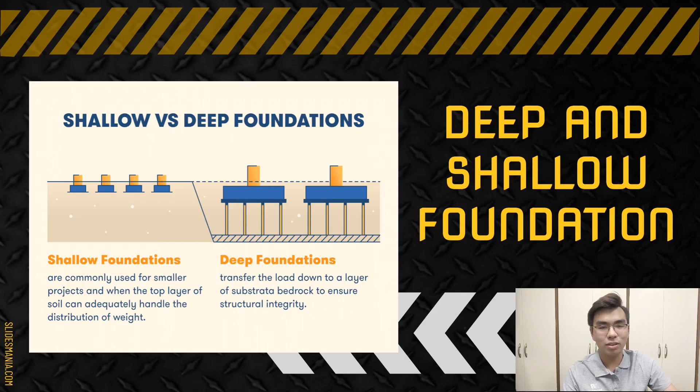The first type of foundation is deep foundation. Deep foundations are required when building on sand and other soft soil that cannot absorb the load of the building. Instead, a foundation must be established deep underground or even underwater, where contact with stronger layers of the earth can be established. Bridges, piers, and dams, for example, must lay foundations underwater while still retaining structural integrity. This is where deep foundations become essential to the construction of large structures.

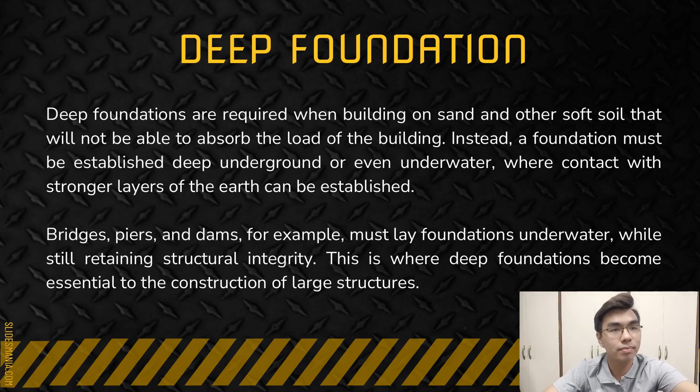The second type of foundation is shallow foundation. Typically, a shallow foundation is one that is wider than it is deep. Shallow foundations can also be called spread or open footings. For obvious reasons, they are the more economical of the two types. They don't require much digging or boring into the earth, which is why they are the most common. Shallow foundations are useful when the building isn't exceedingly heavy and the soil can bear a significant amount of weight at a shallow depth.

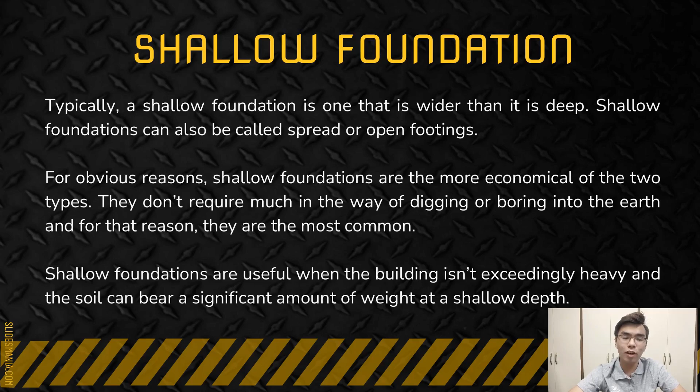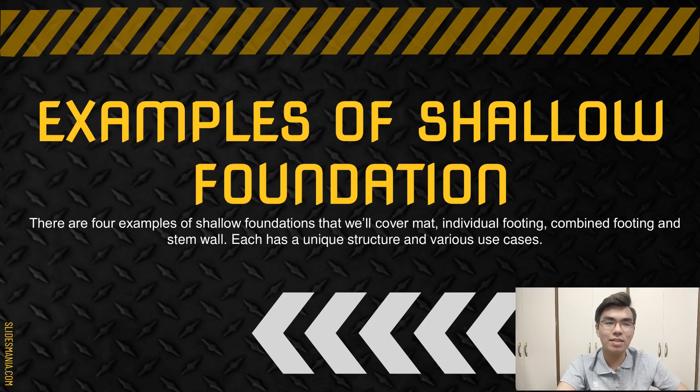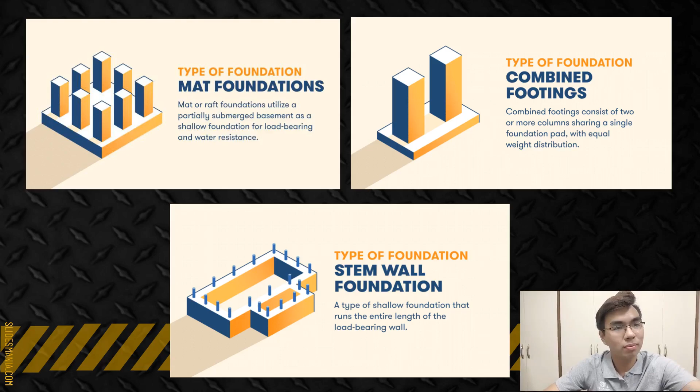The first type of shallow foundation is mat foundation. A mat foundation takes full advantage of the surface area where the building will be erected, essentially using the basement as the entire load-bearing foundation. Mat foundations are often used when the soil is loose, weak, and requires the weight to be distributed evenly, and when a basement is feasible with pillars or columns spaced close together. It is often referred to as a raft foundation because the basement foundation is submerged in the soil, like the hull of a raft in water.

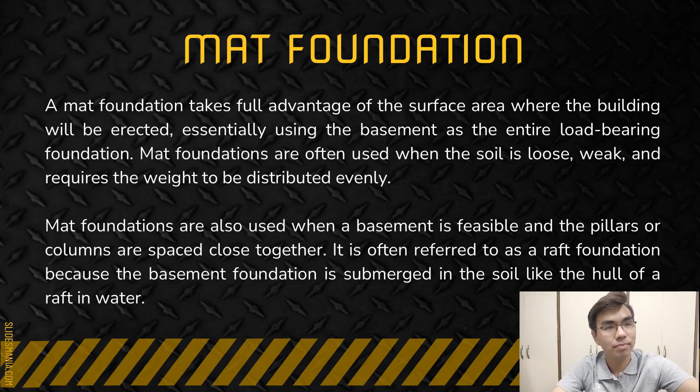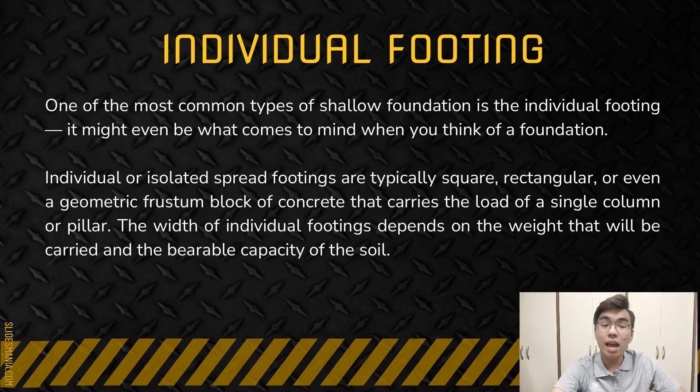Second, under the types of shallow foundation, is individual footing. It is one of the most common types of shallow foundation, perhaps even what comes to mind when you think of a foundation. Individual or isolated spread footings are typically square, rectangular, or even a geometric frustum block of concrete that carries the load of a single column or pillar. The width of an individual footing depends on the weight it will carry and the bearing capacity of the soil.

Third, for shallow foundation, is the combined footing. A combined footing is very similar to an individual footing, except one base shares the weight of two pillars or columns that are close enough together to warrant a shared foundation point.

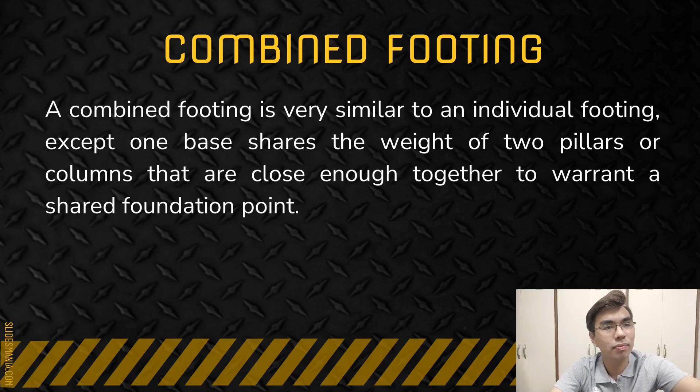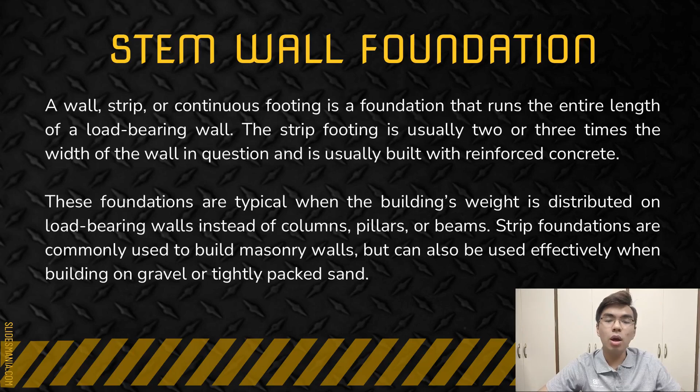Lastly, under the shallow foundation is the stem wall foundation. A wall, strip, or continuous footing is a foundation that runs the entire length of a load-bearing wall. The strip footing is usually two or three times the width of the wall in question and is usually built with reinforced concrete. These foundations are typical when the building's weight is distributed on load-bearing walls instead of columns, pillars, or beams. Strip foundations are commonly used to build masonry walls, but can also be used effectively when building on gravel or tightly packed sand.

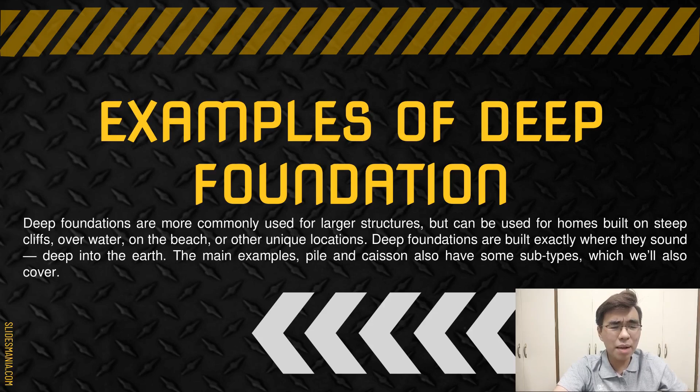Okay, we've finished shallow foundations and the types under it. Moving on, the examples of deep foundation. Deep foundations are more commonly used for larger structures, but can be used for homes built on steep cliffs, over water, on the beach, or other unique locations. Deep foundations are built exactly where they sound: deep into the earth, at the very bottom. The main examples are pile and caisson, which also have some subtypes we'll cover later.

Here are the examples of deep foundation, which are pile foundations and caisson foundation.

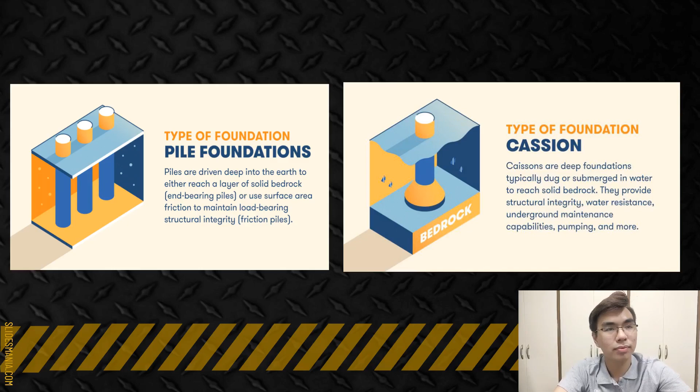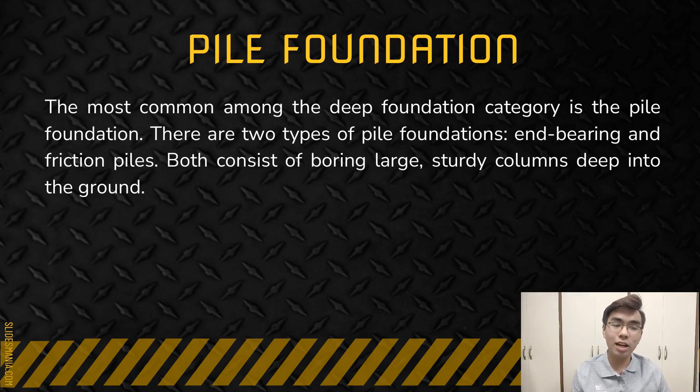The first example of deep foundation is the pile foundation. This is the most common among the deep foundation category. There are two types of pile foundations: the first one is end-bearing foundations, and the second one is friction piles. Both consist of boring large, sturdy columns deep into the ground.

In end-bearing piles, sometimes the soil we build on will never bear enough weight for the project, even with dirt compactors and shallow foundations. Instead, we must bypass this layer of soft soil and get to the substrata of bedrock beneath to distribute the load. End-bearing piles are driven as deep into the ground as necessary for the end to make contact with the rock layer within the earth. This allows the load to be passed through the piling and into the rock, creating a safe distribution of weight.

Second, friction piles. Friction piles take a different approach to the contending layer of soft soil. Instead of boring down to the rock layer, the principle behind friction piles is an exchange of forces with the soil surrounding the column, taking full advantage of the surface area of the column. The amount of weight a friction pile can sustain is directly proportional to its length. Every pile has a zone of influence and must be spaced consistently to ensure even distribution and absorption of weight.

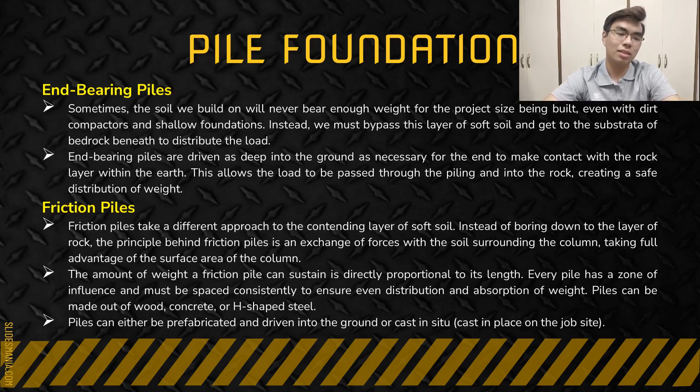The second type of deep foundation is the caisson foundation. A caisson foundation is most often used in construction of a bridge, pier, or other structure over water. But it can also be used to support freeway overpasses, hillside homes, and more.

Caissons can be prefabricated, floated to the drilling site, and placed in a dredged pit. Caissons can also be built on site with a mesh grid of rebar filled with concrete.

To build a caisson foundation, the loose land is dug with an auger until bedrock is reached. While digging, a hollow steel casing can be implanted to prevent the sand or soil from caving in on the progress. The reinforcing mesh rebar is then centered within the casing and concrete is poured, starting at the bottom and filling up the casing, forcing the remaining groundwater out the top. Once the concrete has adequately filled, the casing can now be removed.

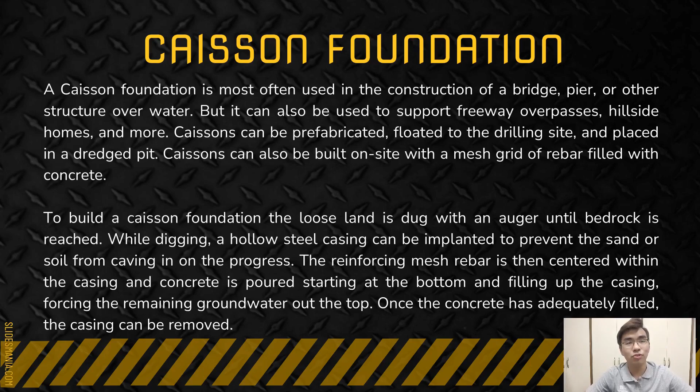Under caisson foundations, there are a few variations. Here are the main examples. First is the open caisson: a box without a bottom sunken into the ground and stabilized with weights for ballast, and a muck tube to remove excess groundwater. The pressurized chamber allows work to be done inside.

Second, pneumatic caisson. When maintenance work needs to be done deep underground or underwater, these caissons are built to enable workers down the shaft. Third is the monolithic caisson: large single-column caissons made of reinforced concrete.

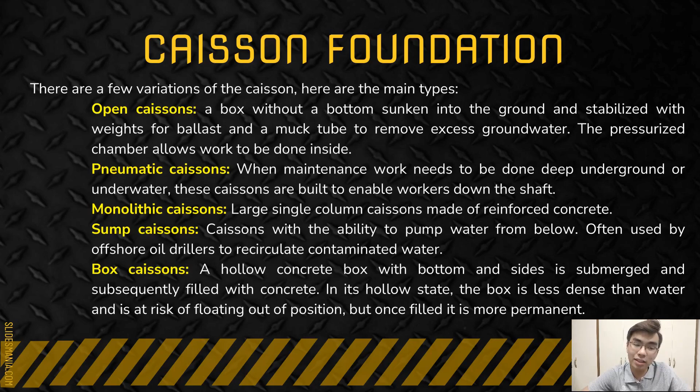Fourth is the sump caisson: caissons with the ability to pump water from below, often used by offshore oil drillers to recirculate contaminated water. Fifth and last type is the box caisson: a hollow concrete box with bottom and sides submerged and subsequently filled with concrete. In its hollow state, the box is less dense than water and is at risk of floating out of position, but once filled, it is more permanent.

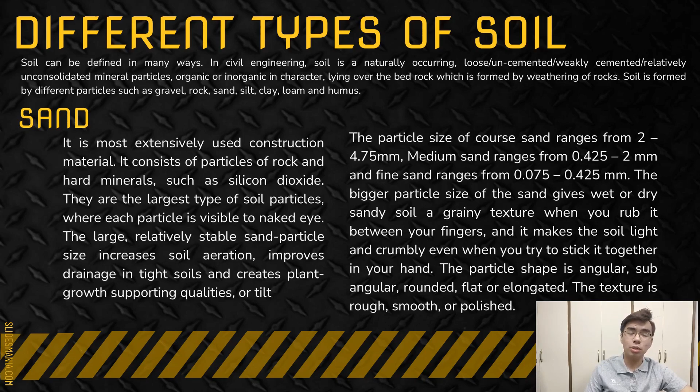The coarse sand particle size ranges from 2 to 4.75 mm. Medium sand ranges from 0.425 to 2 mm, and fine sand ranges from 0.075 to 0.425 mm. The bigger particle size of the sand gives wet or dry sandy soil a grainy texture when you rub it between your fingers, and it makes the soil light and crumbly even when you try to stick it together in your hand. The particle shape is angular, subangular, rounded, flat, or elongated. The texture is rough, smooth, or polished.

The second type of soil is silt. Silt is a sediment material with an intermediate size between sand and clay. It is carried by water during flood. It forms a fertile deposit on valleys floor. The particle size of silt ranges from 0.002 to 0.06 mm. Silt is a non-plastic or low plasticity material due to its fineness. When wet, it becomes a smooth mud that you can form easily into balls or other shapes in your hand, and when silt soil is very wet, it blends seamlessly with water to form fine, runny puddles of mud.

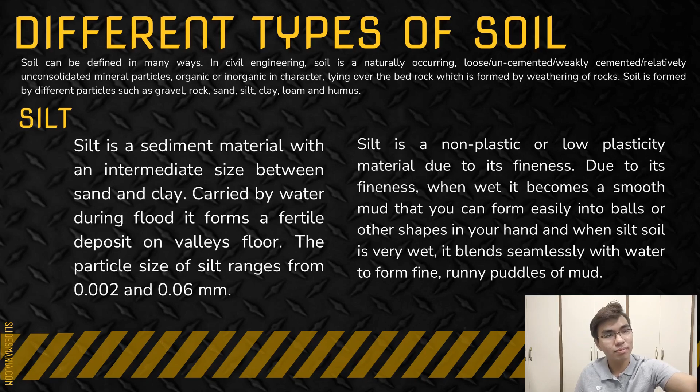The third type of soil is clay. Clay particles are the finest of all the soil particles, measuring fewer than 0.002 mm in size. It consists of microscopic and submicroscopic particles derived from the chemical decomposition of rocks. Clay is a fine-grained cohesive soil. They stick together readily and form a sticky or gluey texture when they are wet or dry. Clay is made of over 25% clay, and because of the spaces found between clay particles, clay soils hold a high amount of water. Clay expands when in contact with water and shrinks when getting dry. Compared to sand particles, which are generally round, clay particles are thin, flat, and covered with tiny plates. Organic clay is highly compressible and its strength is very high when dry, which is why it is used in construction as mud mortar.

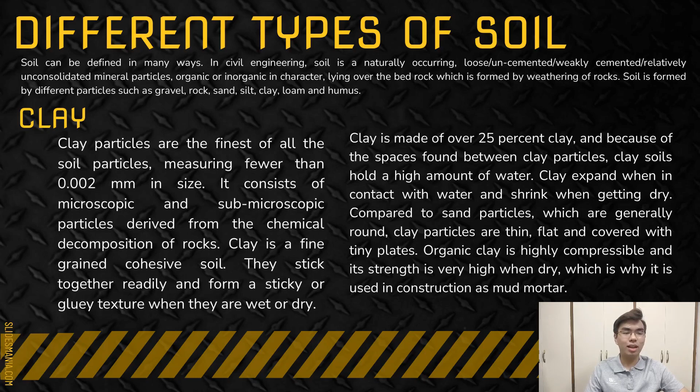For the last type of soil, which is loam. Loam is a mixture of clay, sand, and silt, and benefits from the qualities of these three different textures, favoring water retention, air circulation, drainage, and fertility. These soils are fertile, easy to work with, and provide good drainage. Depending on their predominant composition, they can be either sandy or clay loam. The way other particles combine in the soil makes the loam. For instance, a soil that is 30% clay, 50% sand, and 20% silt is a sandy clay loam. With the soil types before loam listed in the order their particles are most dominant in the loam. The labels clay loam, silt loam, and sand loam are used to refer to soils that are composed predominantly of those ingredients.

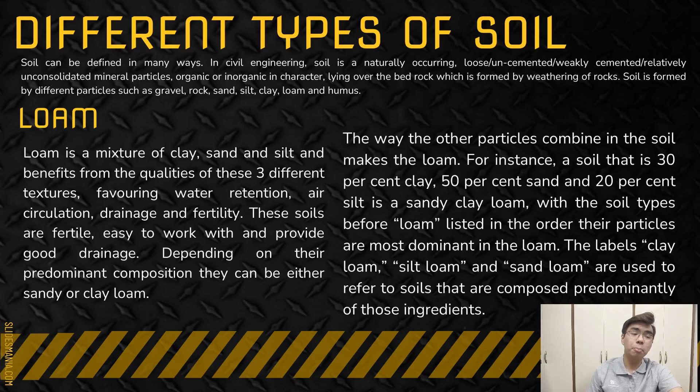Promise, ito na yung last para sa part ko, which is the 4 types of geotechnical testing. So let's start. The first type of this is the test pits.

Test pits are much like you would expect. A pit is dug either manually or with an excavator in order to reveal the subsurface conditions to the depths desired.

Second one is trenching. Trenching is similar to test pits, except that in this case, the pit is elongated over some distance in order to establish how the subsurface conditions change over various parts of the work site.

Third is boring. Borings, usually deployed by a drill rig and drill crew, can vary in diameter and provide the opportunity to assess density through standard penetration testing or SPT, to physically remove soil or rock samples for assessment and testing. This is the boring machine you see being used in the construction of the MRT now, the one that drills into the ground.

And the fourth and final type of geotechnical testing is in situ testing, or on-site testing methods, which include penetration tests such as SPT, which penetrate via drilling, percussion-based investigation techniques, sonic vibratory drilling methods, and various static direct push cone penetrometer testing or CPT. That is all for my part.

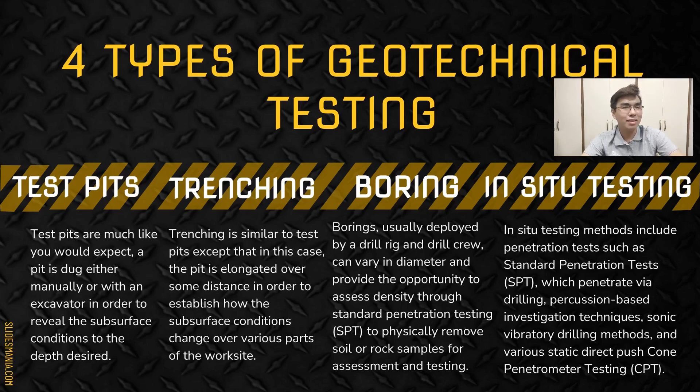The next section will discuss the main types of geotechnical failures that occur in open-cut coal mines. In excavated slopes, these include planar, wedge, toppling and composite failures. In dumped material, these include active-passive wedge failures. Failures that may occur in both excavated and dumped slopes include circular failures and isolated rock fall failures.

Planar failure. These types of failures occur where a block of rock slides along a single defect that dips and daylights in the excavated face. Wedge failure occurs where two continuous planar defects intersect and daylight in the excavated face.

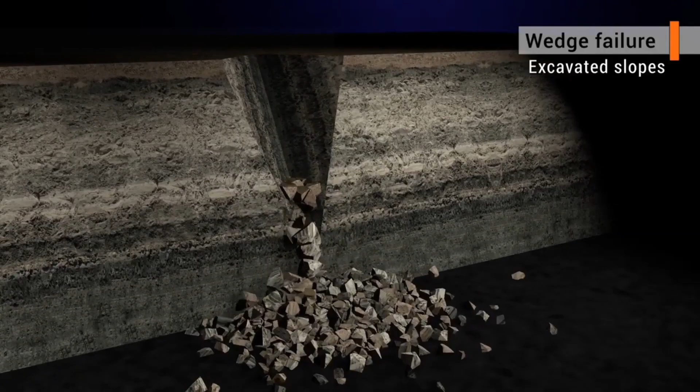Toppling failure. Toppling failure occurs when persistent defects dip steeply into the excavated slope and the blocks or columns formed topple out of the face. These failures generally have a weak layer at the base that the vertical blocks slide along.

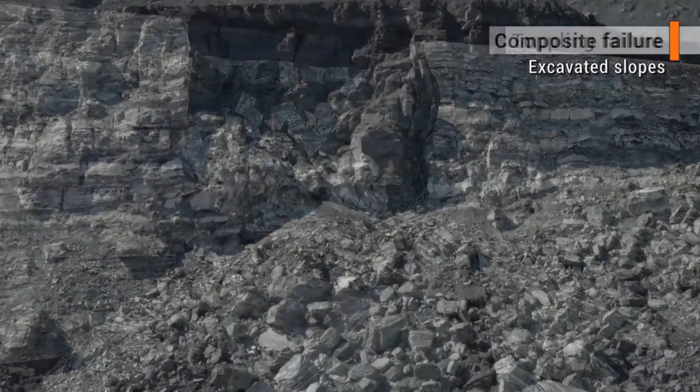Composite failures. These are typically the most common type of failure in excavated coal mine slopes. Composite failures involve a combination of planar, wedge and toppling failure modes along persistent defects, and also some component of rock mass fracturing and failure. Typical composite failures are vertically to subvertically bound by structural defects and horizontally bound by a weak, generally carbonaceous layer. Such failures occur at both the individual bench scale or as a failure of the overall pit slope.

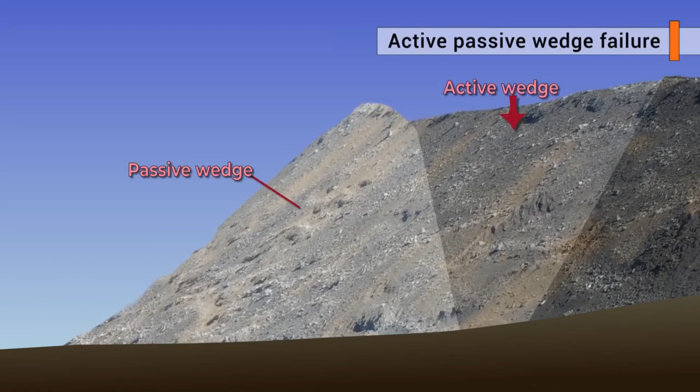Active-passive wedge failures. These types of failures occur in dumped slopes, particularly where the dump is formed on a weak and/or steeply dipping floor. Circular failures.

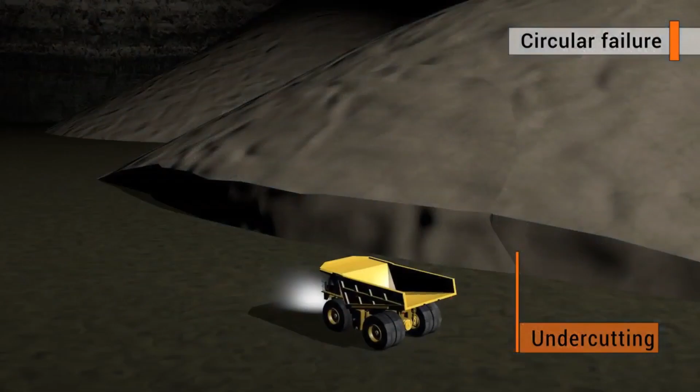Circular failures occur in highly weathered, soil-like or dumped material that contains little to no large rock fragments. Circular failures may be deep-seated or may occur near the surface where they are referred to as skin slippage failures. Circular failures typically result from an excavated or dumped slope that is greater than the angle of repose through undercutting or over-steepening mining practices.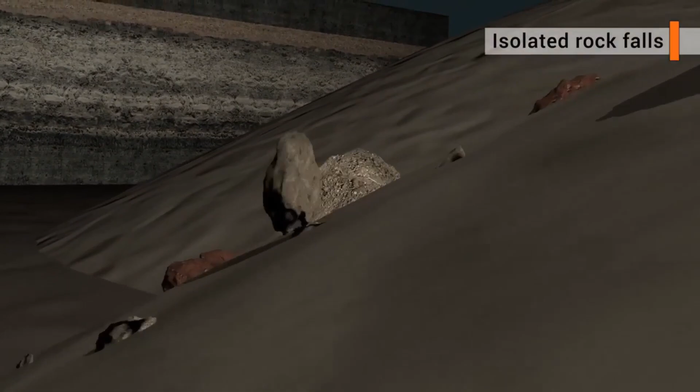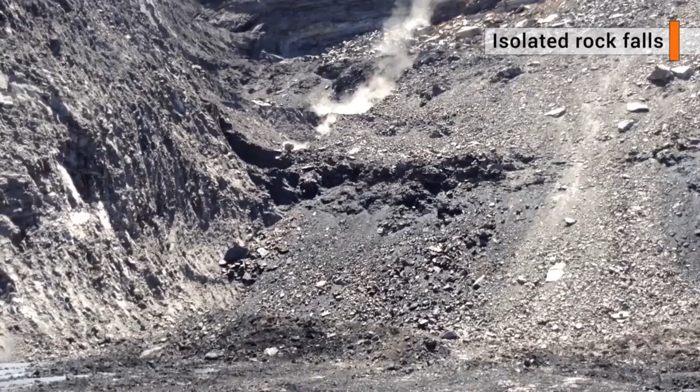Isolated rock falls. These are failures in which individual rocks fall out of a dumped or excavated slope face. Isolated rock falls can be just as hazardous as failures involving a whole slope face. They generally occur after heavy rain events, where poor separation of dumped material has occurred, or where blasting has been poorly executed and the face not adequately scaled for loose rocks at the time of mining.

Once a geotechnical hazard has been identified, an inspection will be completed as per site requirements. Controls will then be put in place to effectively manage the hazard. Controls must be followed at all times. If you observe conditions to change from those documented in the site hazard report, notify your supervisor immediately.

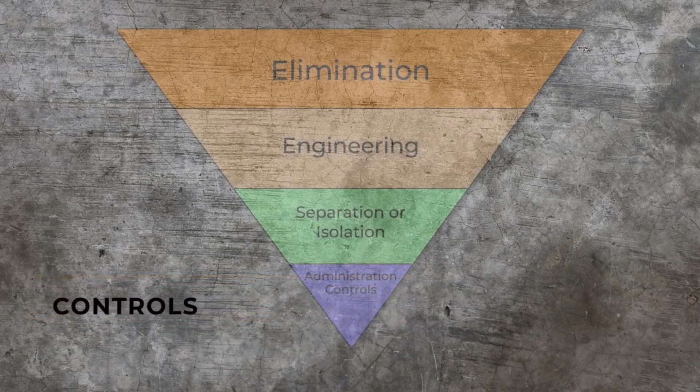Typical controls to manage geotechnical hazards using the hierarchy system include elimination controls, scaling or chaining of slope faces and crests to remove loose rocks, and trim blasting to remove unstable ground.

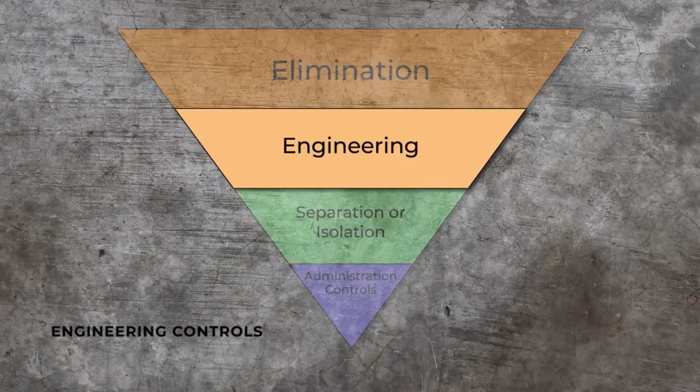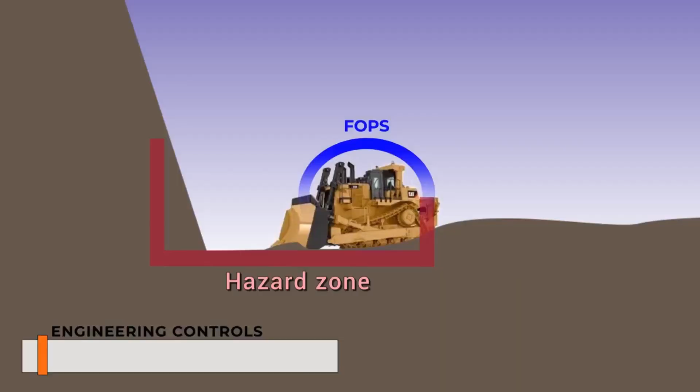Redesign or engineering controls include altering the blast design, such as changing from a hard wall to a soft wall, installing temporary buttresses, reviewing and redesigning the mine plan, such as incorporating additional benches into both excavated and dumped slopes, and only allowing equipment with falling object protection installed to work within the hazard zone.

Separation or isolation controls include controlling access at the crest or toe of the identified hazard by installing hard barriers, and restricting to single lane access past the hazard.

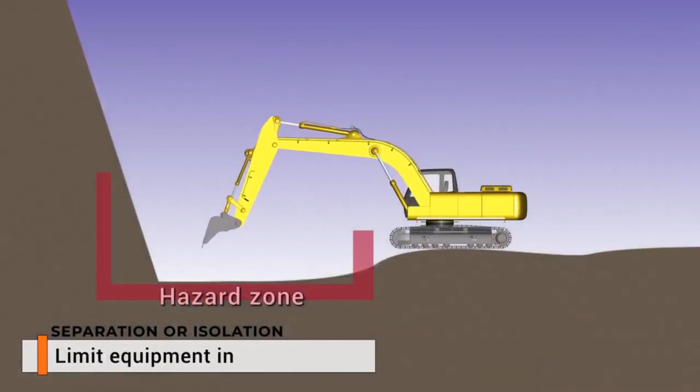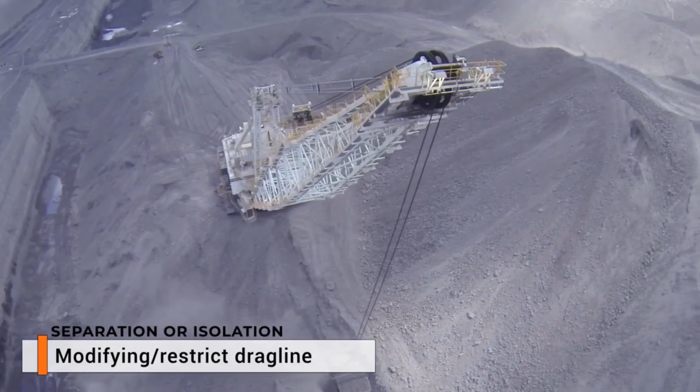Limiting equipment used in the hazard zone, such as allowing the excavator arm and bucket only inside the hazard zone, or modifying or restricting the dragline dig sequence to minimise exposure to the hazard, regrading or re-establishing tip heads, and rectifying drainage conditions, including installing pumps and grading slopes away from the crest into a sump.

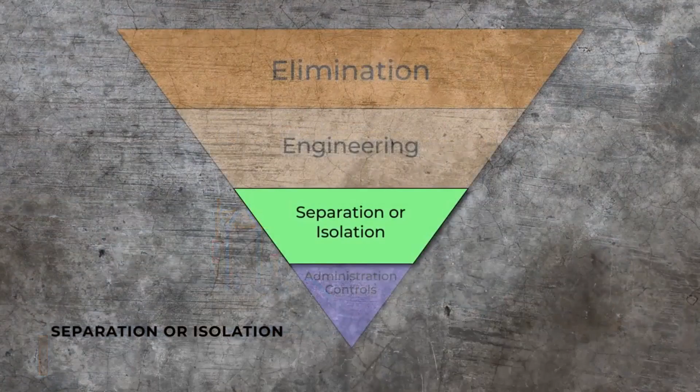Administration controls include increasing the frequency of inspections, allowing only experienced operators within the hazard zone, completing additional risk assessments for specific mining sequences, such as mining on retreat or backfilling after mining coal, and establishing monitoring controls, such as peg telltales, wireline extensometers, prisms, LiDAR or slope monitoring radars.

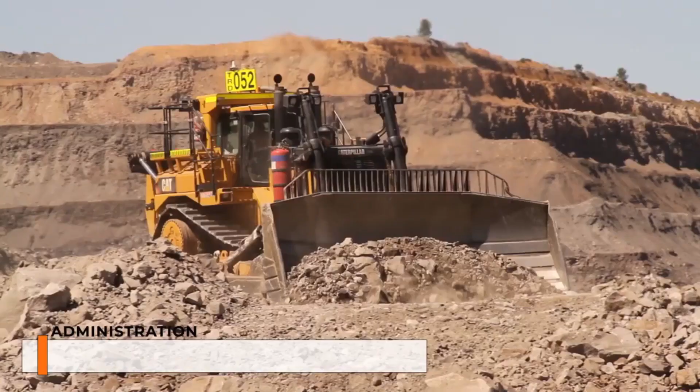Restricting operations to daylight hours only, or installing additional lighting. The number and nature of controls is governed by the consequence and likelihood of a slope failure occurring. Slope monitoring and implementation of standoff zones are two of the most commonly applied and effective controls if managed correctly.

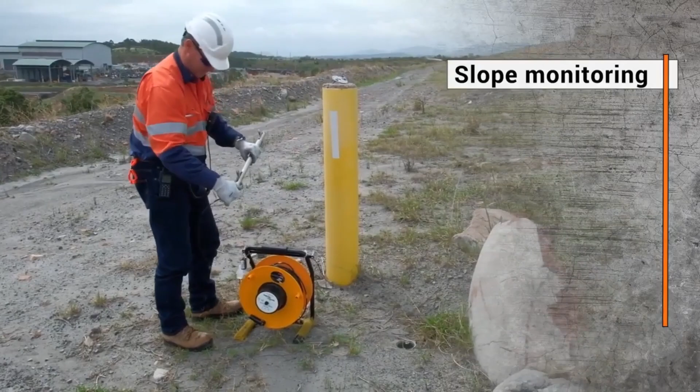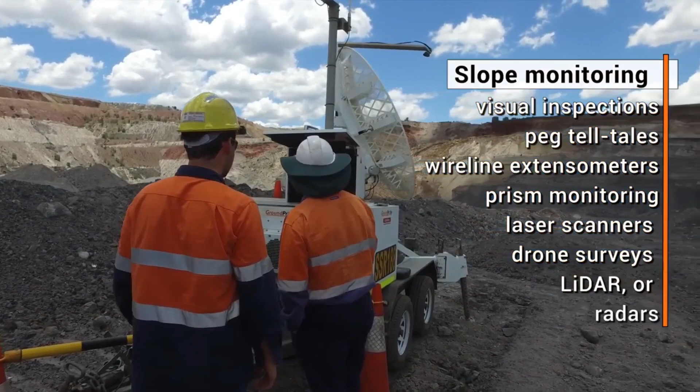Slope monitoring is completed by one or more of the following methods: visual inspections, peg telltales, wireline extensometers, prism monitoring, laser scanners, drone surveys, LiDAR or slope monitoring radars. Monitoring devices can be used for either long-term, broad-scale detection of slope movement or targeted monitoring of a specific area of concern.

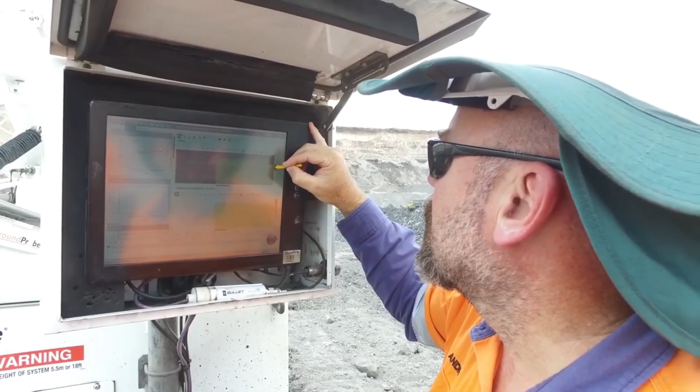Regardless of the monitoring device implemented, it is important to remember the following. Monitoring devices deployed should be able to measure the direction and magnitude of slope movement. Monitoring backsight devices need to be mounted on stable ground, otherwise false or misleading measurements can be recorded. Monitoring equipment needs to be regularly inspected and serviced to ensure it is operating as required. Trigger or alarm levels need to be predefined and should be set at levels specific to site conditions.

Standoff distances can be applied at both the crests and toes of excavated or dumped slopes. Standoff zones are typically based on empirical charts, past performance of slopes with similar conditions, or modelling results from software simulating individual rockfalls or slope failures. The applied standoff distance should be appropriate for the type, size, likelihood and consequence of slope failure.

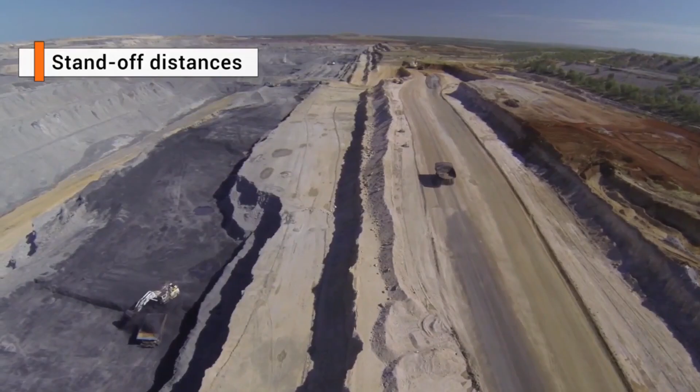Many sites have standard restriction zones that are applicable at all times. Increases or decreases to these standard restriction zones are then made on a case-by-case basis depending on the specific hazards present.

So now, we will discuss what are the usual problems faced by geotechnical engineers. According to Wiley Online Library, there are three main types of problems faced by geotechnical engineers. These are failure load problems, deformation problems, and flow problems.

On to the first type of problem, which is the failure load problem. This occurs when a load at which the pipe body or the connection will fail disastrously, as in an actual separation, a rupture, large permanent deformation, for example buckling or collapsing, or massive loss of sealing integrity. A typical solution to the problem of finding a failure load, for example the ultimate bearing capacity of footing, or a failure moment with an example of slope stability, is to use the limit of equilibrium analysis.

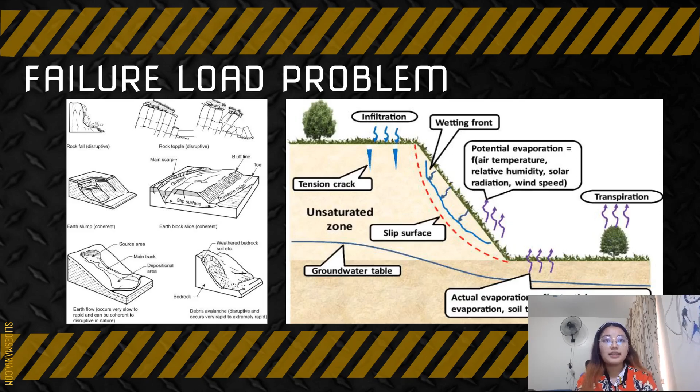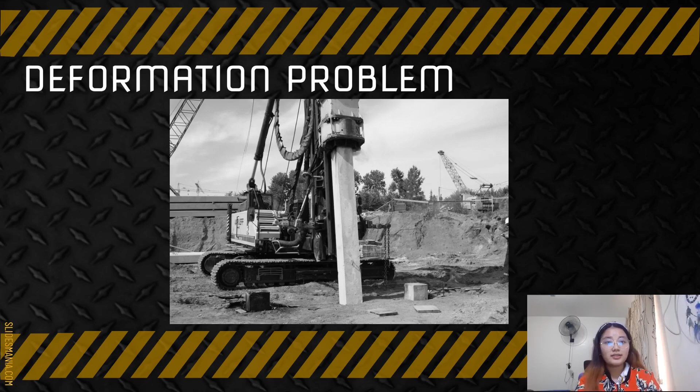Many problems in geotechnical engineering involve large movements or rotations. Examples include man-made processes such as earth moving and pile penetration, or natural processes such as landslide. The problem of large deformation often occurs in geotechnical engineering. Numerical modeling of such issue is usually complex and tricky. The chosen solution has to implicate soil-soil and soil-structure interactions.

So for our last topic, which is the flow problems, permeability is one of the most important physical properties of a soil, as some of the major problems of soil mechanics are directly connected with it. Design of highways, airports, earth dams, construction of foundation below water table, yield from a well, as well as settlement of foundation and other projects depend upon the permeability of a soil. Hence, to become a good soil engineer, the knowledge of permeability is very essential.

A material is said to be permeable if it holds continuous voids. Since such voids are contained in all soils, including the stiffest clay, all soils are permeable. Gravels are highly permeable, and stiff clay is the least permeable soil.

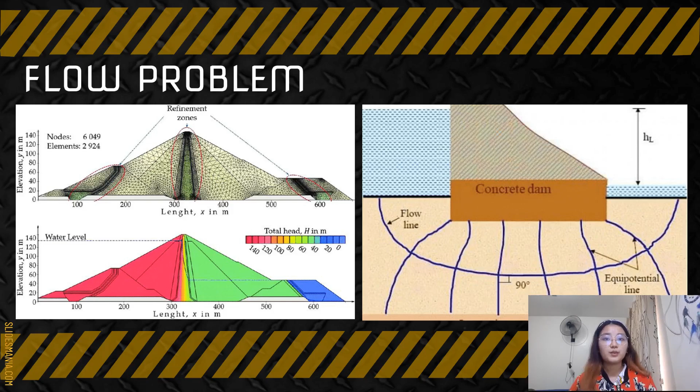So from the discussed topics, which are the failure load problems, the deformation problems, and the flow problems - these are the usual problems faced by geotechnical engineers of our modern society.

And now, we will meet two geotechnical engineers, Dr. Amy Cerato and Engineer Pia Mavani. They will discuss what it's like to be a geotechnical engineer and their daily life as a geotechnical engineer.

Hi future engineers, my name is Amy Cerato and I'm a geotechnical engineer at the University of Oklahoma. Geotechnical engineering is all about the study of what happens underneath the ground and how what happens underneath the ground affects what we build on the ground. And so I worry a lot about earthquakes and flooding and high wind events and try to figure out how to build structures that keep humans safer from those elements.

When I was in high school, I had never heard of engineering, and I had a junior level teacher who encouraged me to do an internship with a National Park Service. Between my junior and senior years, I went down to Kentucky Cumberland Gap and lived backcountry for six weeks, and we had to revegetate trails, find our own water sources, and my group leader said, 'Amy, I think you'd be a great engineer.' That was the first time I'd ever heard the word engineer.

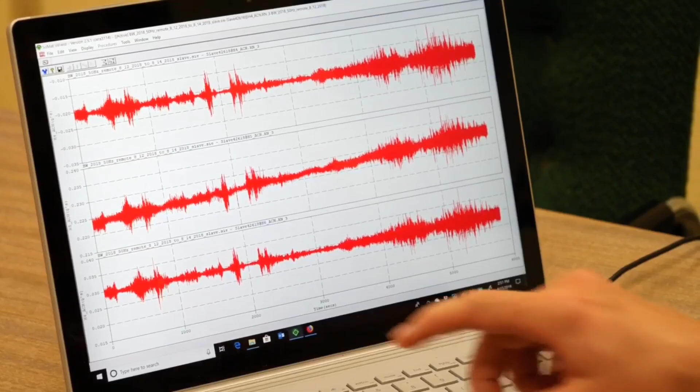A typical day at the university is meeting with students, teaching some classes, working in the lab on some research, and coming out here to the field and doing full-scale testing, which helps to validate our numerical models.

When I first came to the University of Oklahoma, I was fascinated that we had something called expansive soils. Back east, everything is saturated, which means it has a high water table, and the soil stays relatively the same. When you come to Oklahoma, we have a very dry climate, and the soil expands when it rains and shrinks when it dries. I became fascinated with trying to build foundations that would keep houses from swelling and shrinking during these wet and dry cycles.

In 2008, I won a presidential award, which is the highest award they give young career faculty in the country, and I got to meet with President Obama at the White House. That work with expansive soils really led into a love of trying to design in all different types of soils to keep everything we build more stable and have a longer design life.

I believe some misconceptions are that you have to be excellent in math. I believe you have to be competent in math, but you have to want to solve problems in this industry and be creative. So I try to tell young people that if you have a really creative mind and you like coming up with solutions that aren't already known, you can be an engineer. You always have the ability to use the math you've learned, but we don't do math and differential equations every day.

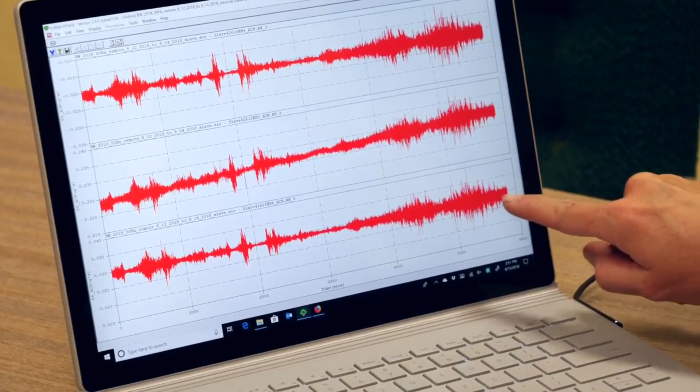That's pretty exciting because not very many people have had the chance to instrument pile foundations underneath these towers. This research is so exciting because we can measure the dynamic loading of a wind tower, of a bridge system, of a gas compressor, and figure out how to keep these structures safe and producing whatever we've intended, whether it be wind power, gas collecting and refining, oil refining, or even keeping bridges from collapsing during earthquakes.

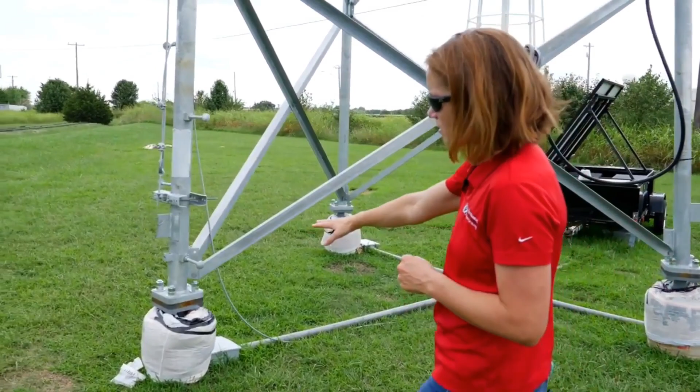If you come over here and look at these, we can see some of the instrumentation, which is covered by this plastic because of all the rain we've had. We have accelerometers that measure the G-forces, and down underneath the ground we have a lot of strain gauges which allow us to see how those piles are bending under the wind load.

We're hoping that towers like this and wind power like what Bergey is generating can be brought into smaller communities in China and Africa and rural America where they can't get concrete because it's too far away from the batch plants. They can spin these helical piles in, put these towers up, and generate wind power that can provide water to their village and electricity to their houses.

These piles and systems are great because if you need to take them down and move them, all you do is take the tower down and then take a machine out here and spin the pile out of the ground, and you leave no trace that you were ever there, which I think is a great green alternative to a concrete foundation.

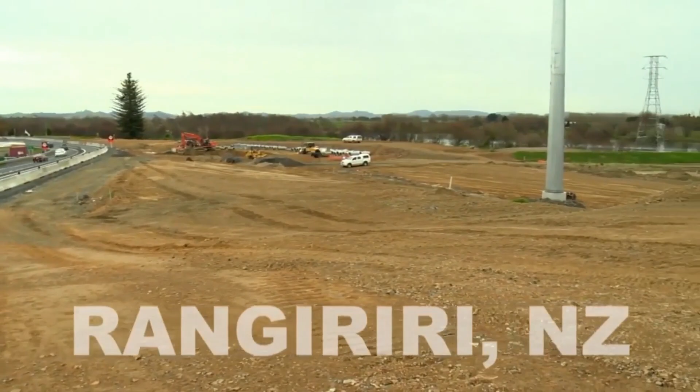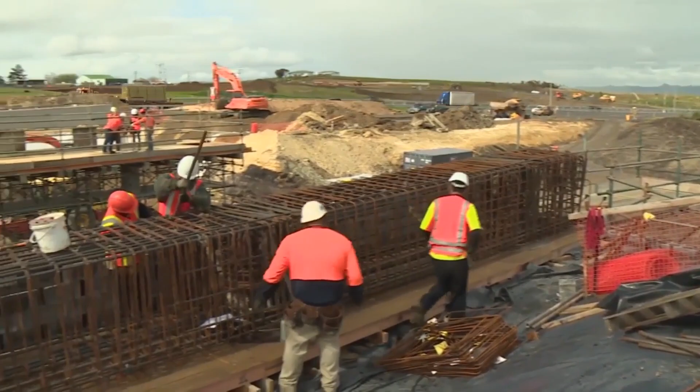My job title, I guess, is graduate civil engineer. I'm working with the geotech team. It's like a crash learning course for me, being somewhat fresh out of uni with a couple of years experience, and working with a team of people who've been in the industry for over 10, 20 years and have seen it all. It's a privilege, really, just to be working with people like that.

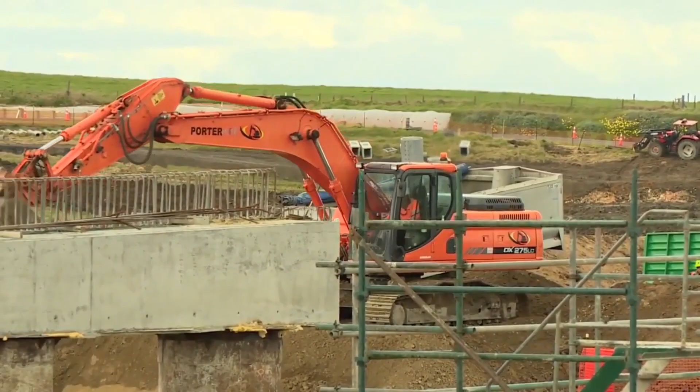This job we're at the moment is called the Rangiriri Bypass. It's part of the Roads of National Significance and part of a section of the Waikato Expressway. MWH did the design on this section of the highway, and we're currently working for the contractor to help interpret our design. As part of the engineer's representative role, we do a lot of inspections on the contractors' work, checking that it's in line with the specification and drawings, and also deal with queries that come through from the contractors to the designers. So I guess you could say it's sort of a middleman role.

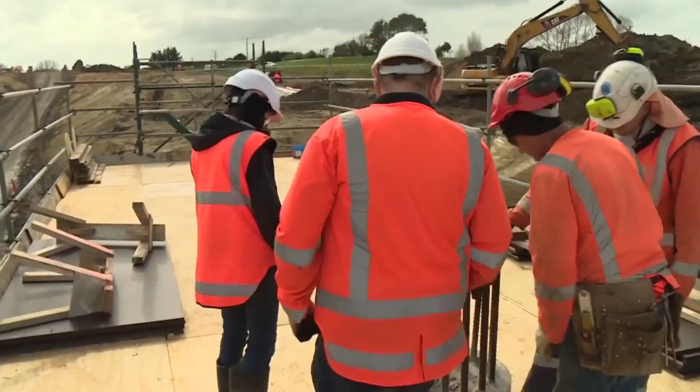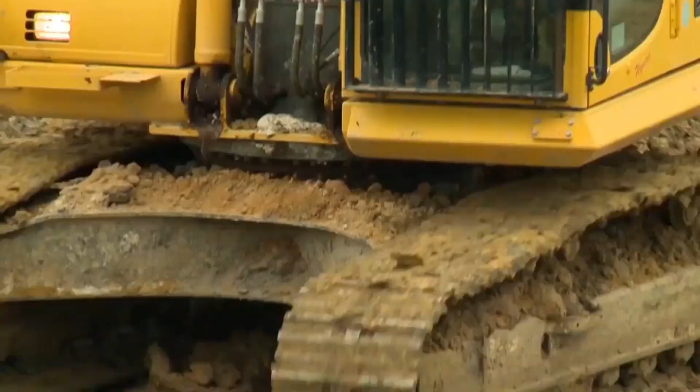Can be a little bit intimidating, especially when you walk into that first induction and you've got 50 guys staring at you thinking, who brought their daughter into work today? Yeah, I love it though. It's so fascinating, there's so much going on, and you see your structures and a whole bunch of earthworks and dirt, which I love because I'm a geotechnical engineer.

I'm Priya Mavani and I'm a geotechnical engineer with MWH Global.

To reiterate from the beginning, geotechnical engineers are part of a branch of engineering, actually a specialized one. If architects are still making blueprints and designs, and computer engineers are developing computer hardware, then geotechnical engineering relates to dams, bridges, roads, and every earthwork you could possibly imagine.

In this portion of the video, I'll be discussing and showing you illustrations as to what these engineers do for a living, and how they contribute to society in general. Later in the video, we'll show you some of the famous works of geotechnical engineers that have been immortalized up until this date.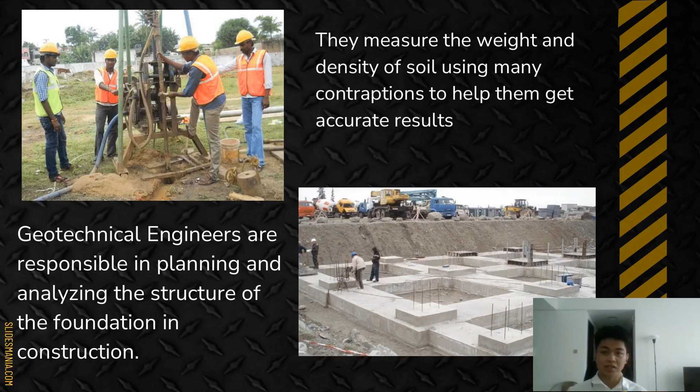That's what foundations are - because without the foundation, a building is practically impossible. The Burj Khalifa is impossible without solid foundations, because without them it would be destroyed by earthquakes or natural causes such as the moving or shifting of tectonic plates.

So let's move on to slide number 36. As stated here, faulty or absence of geotechnical engineers can result in many roads and structures being destroyed easily. Like I mentioned on the previous slide, geotechnical engineers have important scouting abilities, such as measuring soil density using many contraptions, as well as planning solid foundations. Without them, we won't stand a chance surviving falling buildings, debris, and all that stuff.

So imagine, let's apply Valorant here for a second - imagine a Breach just used his ultimate, like let's go, and it completely destroyed the roads. That's where geotechnical engineers come in. For damage report, they go and analyze what went wrong, the composition of the earth, the roads, what it's made out of. They're basically analysts.

So they have knowledge about geology also. They won't be called geotechnical engineers if they don't know earth-related knowledge and all that stuff.

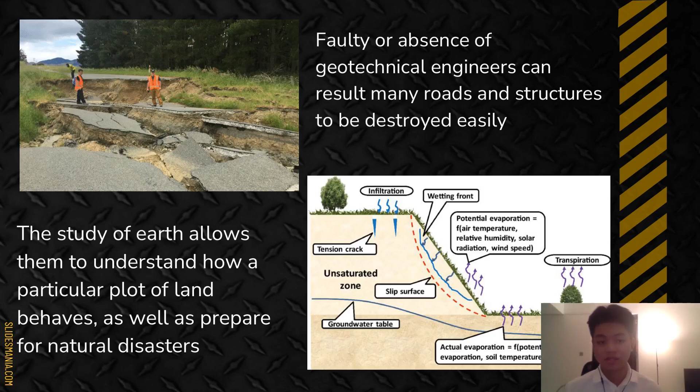They try to generate disaster plans, in short. To sum it all up, geotechnical engineers are the earth benders in real life, who, after carefully studying the soil, are able to make solid foundations for buildings so they are stable, as well as make plans for natural disasters. They are basically unstoppable forces.

Hello again, everyone. For this portion, I will be discussing some of the famous works done both internationally and locally here in the Philippines. To start, I'll share the first one, the international work, the Leaning Tower of Pisa, or Torre Pendente di Pisa.

This tower was built in the city of Pisa, Italy, on August 9, 1173. Construction took almost 200 years, and the architects who spearheaded the design and building were Bonanno Pisano and Gherardo di Gherardo. The tower was originally built to be a bell tower for the cathedral complex recently built at that time, but shortly after it was built, it was deemed unusable due to the lean that started to form. The tower stands at 185 feet and is made of white marble.

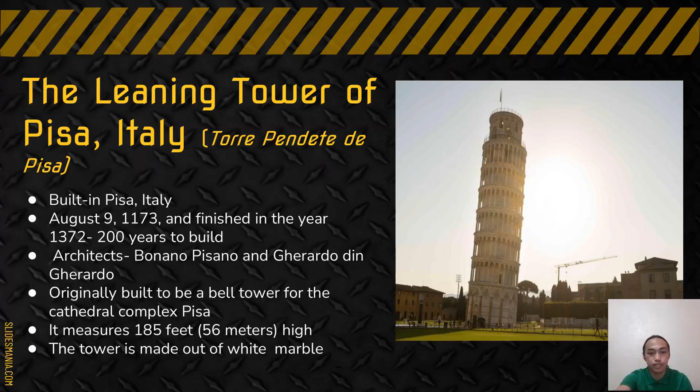For the second portion, I will discuss some of the reasons and factors for why the tower leans. Let's watch this video recording that explains some of these factors. That recording only explains some of the reasons why the tower leans.

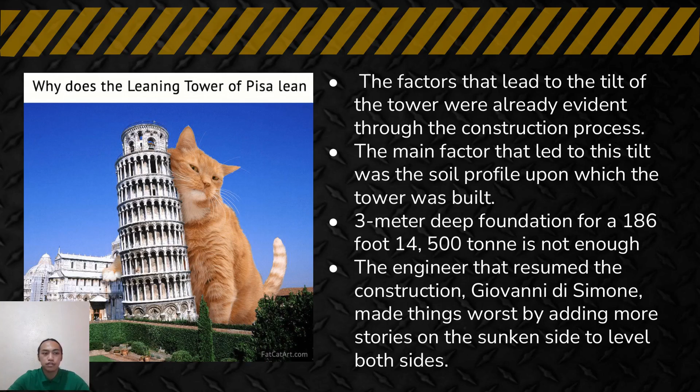In addition, there was also an external factor that affected the lean of the tower, which was the plan to level both sides. An engineer named Giovanni di Simone tried to add more stories to the sunken side, which resulted in a much less favorable lean.

Aside from these reasons, one of the biggest contributors to the lean is the tower's geological location. The tower's location was near the seashore, which caused the subsoils under it to absorb water. This caused sedimentation on the north side, resulting in more material building up there, making it appear higher than the south side.

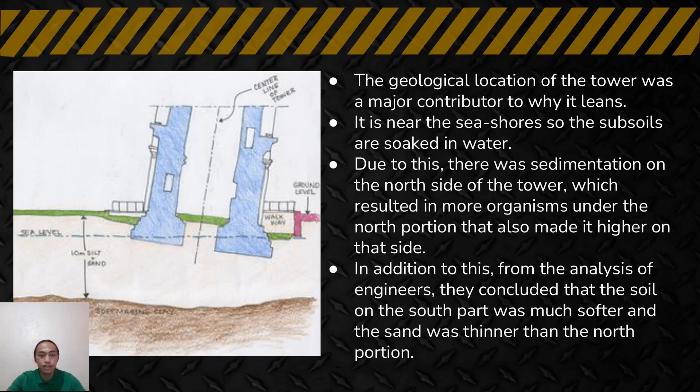In addition, according to engineers' analysis, there was also a problem with the soil on the south side, where the tower leaned towards. They found that the soil on the south part was significantly softer and clayey, and the sand was thinner than on the north side. This shifted the weight towards the south part.

Moving to the next work, we now focus on local works done here in the Philippines. The famous work we decided to present is the Philippine Arena. Stationed in Bocaue, Bulacan, the Philippine Arena was constructed in 2011 and finished in 2014. It is considered the largest indoor stadium in the world. The engineer for the project was Buro Happold, and the architects were from Populous, a global mega architecture firm.

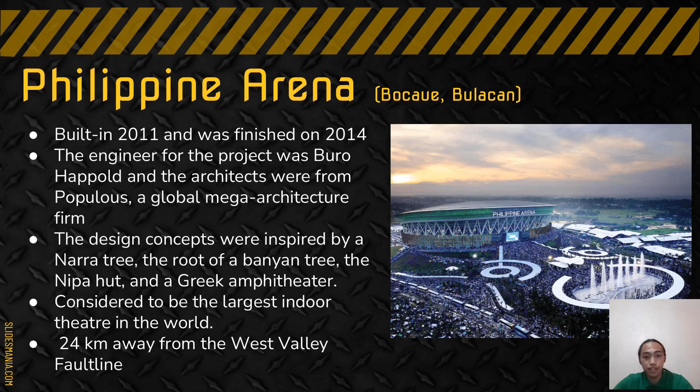This project was funded by the Iglesia ni Cristo, and the design concepts were inspired by a Narra tree, the roots of a banyan tree, the nipa hut, and a Greek amphitheater. The arena itself resides 24 kilometers from the West Valley Fault, which puts it in a difficult situation should a strong earthquake occur.

The plan was to build a complex able to fit 50,000 people inside and another 50,000 outside. But the problem lay in the strength of the complex - it should be safe enough in case of emergencies. For this to happen, the foundation it was built on had to be firm and sturdy. Thus, the ground was dug and reinforced with steel to make it stable.

Moreover, the ceiling frames were divided into 46 parts and then constructed on the ground, then brought up onto the steel frames, making them lighter, to minimize debris falling that causes accidents.

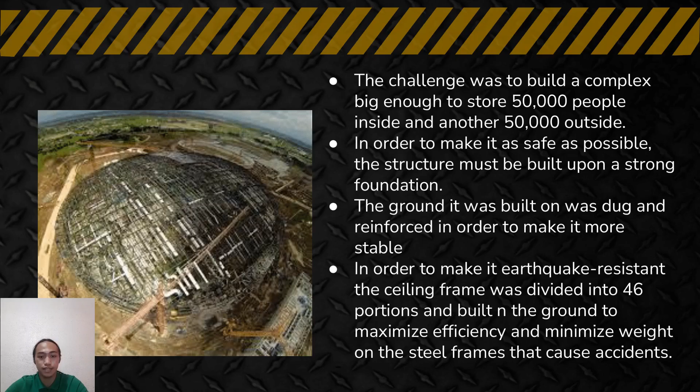Being considered one of the top 5 most earthquake-resistant buildings in the world, the Philippine Arena should speak for itself. Buro Happold designed it so its seismic design could withstand earthquakes ranging from magnitude 7.0 to 7.5. This is due to the lower part of the arena that can bend and sway and still not break, because of the lead rubber bearings that act as shock absorbers.

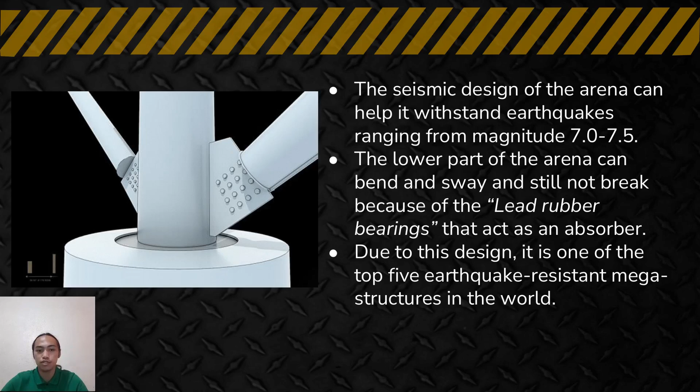Within its design also contains topography planning that helps in making better decisions regarding what to use so that the foundation might be better.